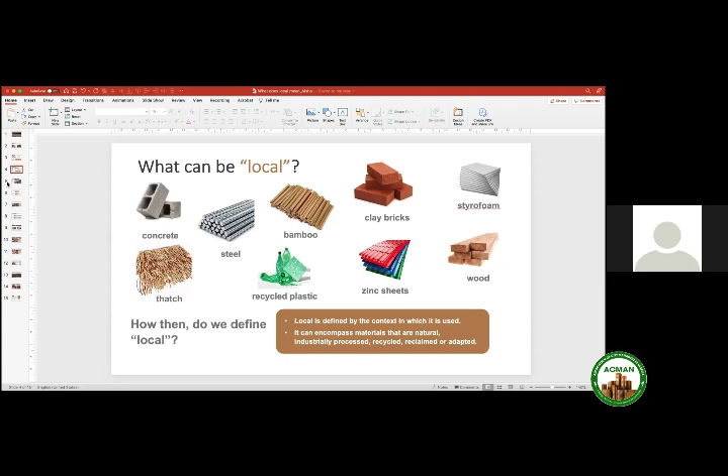But let's go ahead and look at local in the context of displacement. Displacement usually comes about through

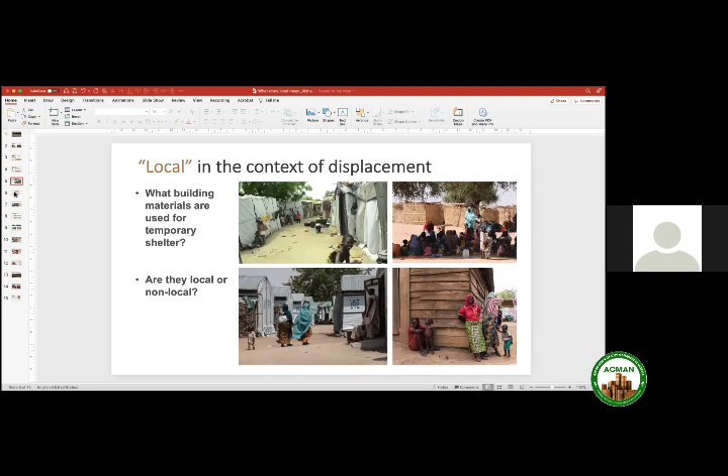conflict or disaster, whereby people lose their homes, their livelihoods, and even families sometimes. If you look at the images on the screen right now, you can see a mix of materials. Some could be termed as local, some could be termed as non-local, but they're all materials that are used for temporary shelter.

If we dig deeper, we can then see there are different conditions that influence material selection. In the context of displacement, what we're thinking about is the uncertainty of how long that displacement would last and how safe it is for people to even move somewhere else and settle.

We're quickly thinking, okay, how do we get shelter delivered to these people? We need to construct shelter for them very fast. And there are economic constraints attached to such conditions. You usually have the UN providing aid.

So again, finding the labor and the skills needed to be able to deliver such rapid construction is quite difficult in the scale that it would be needed.

And then we would also need to keep in mind that such communities and such developments for displaced people are always termed as temporary settlements. So whatever is constructed should be something that is easily disassembled.

With that definition, we can look at different local materials, such as the ones that we saw in the previous images. There was wood, there was thatch, there was zinc, there was also tarpaulin, which may or may not be termed local depending on where it is sourced from.

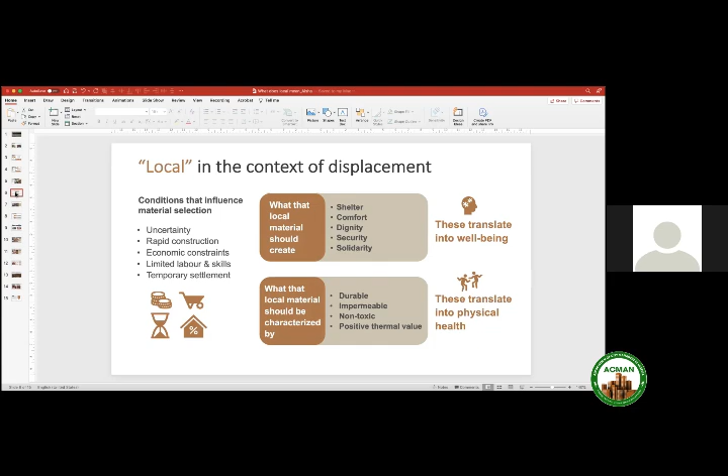It should be impermeable to the elements of weather. It should have non-toxic characteristics, and it should be able to provide some sort of thermal value, either by being an insulator or a conductor.

So if we look at an example, we have our architect Rizvi Hassan, who standardizes local materials in refugee camps for Rohingyans in Bangladesh. He uses materials like concrete for the base of the buildings and cement to do the flooring and make it impermeable.

He uses metal sheets for the roof of the wall panel such that it's easy to construct the buildings and dismantle them when they're no longer needed. And then he added plastic mats for the ceiling to serve as insulation.

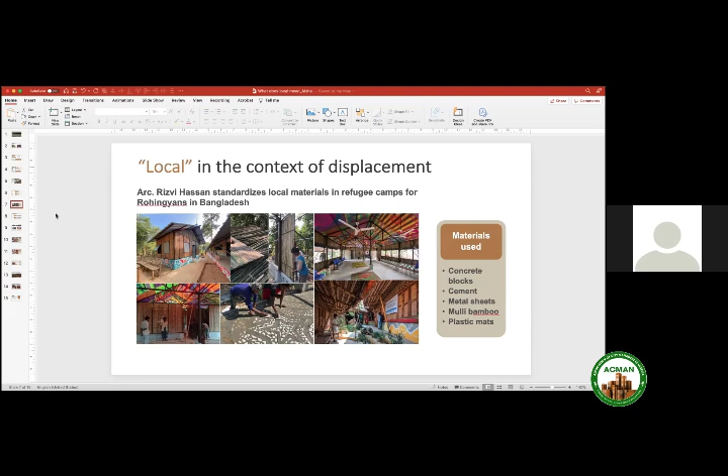Now, looking at it critically, we would then ask ourselves, is local always good? Local materials have impacts on our well-being and our health. If we're looking at well-being, it could be termed as the social dimension, whereas physical health would belong to the environmental dimension.

In the social dimension, like we spoke about previously, it would be safety, social ties, culture, and our livelihoods. So in the social dimension, a local material could have both positive and negative impacts.

It could create jobs through the sourcing of the material, its application in construction, as well as maintenance after construction has been completed. It could also strengthen social networks between the users of the building as well as the actors involved in the creation of such buildings. And it could strengthen cultural identity by making the local material to be perceived in a more positive aspect.

On the flip side, it could lead to stakeholder power struggles, where certain people feel they have more rights to claim a material as local to them. And in terms of the sourcing of such materials, it could also lead to insecurity challenges to the safety of the actors involved in extraction.

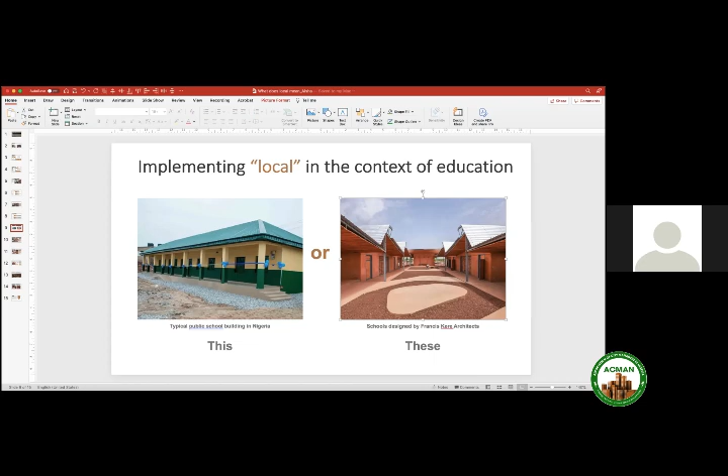Let me just see if that might work. So these are schools designed by Francis Kere, who has already been touched upon by many of the speakers before me.

And I would like to do a little deep dive into that. So he standardizes local materials for school buildings in Africa. He uses earth, bricks, metal sheets, steel rods, and eucalyptus wood, which is actually a non-indigenous species to Burkina Faso, as well as concrete.

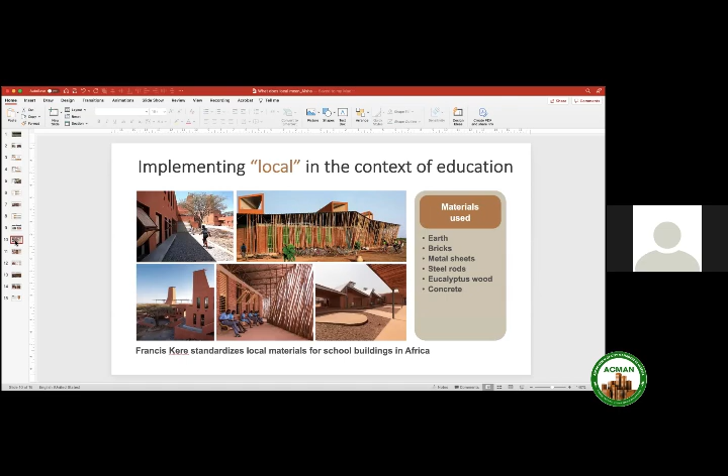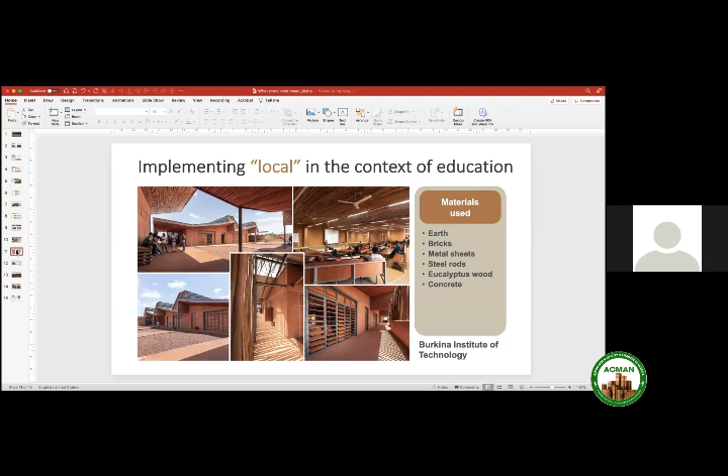In one of his buildings, the Burkina Institute of Technology, he uses earth that has been reinforced with cement, bricks, metal sheets, steel rods, and the eucalyptus wood for the ceilings and the shading devices for the walkways around the school.

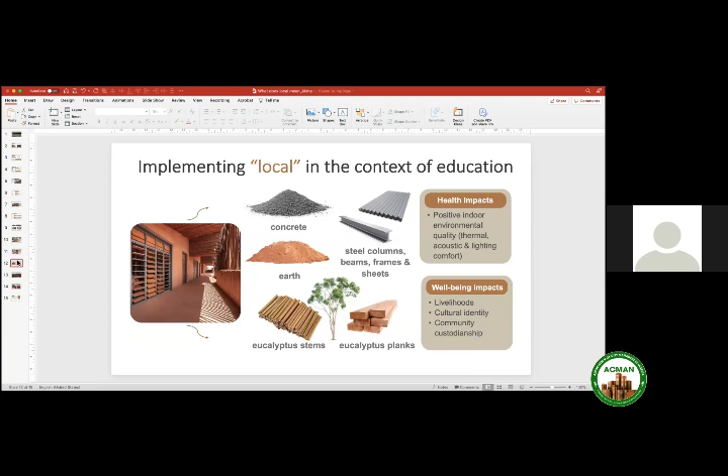And if we're looking at it in terms of health impacts and well-being impacts, the combination of these materials creates a positive indoor environmental quality in terms of the thermal, acoustic, and lighting properties of this building. It also impacts the well-being of the people, the users, the community, people involved in the construction through the creation of livelihoods, a positive cultural identity, and improved community custodianship of the building.

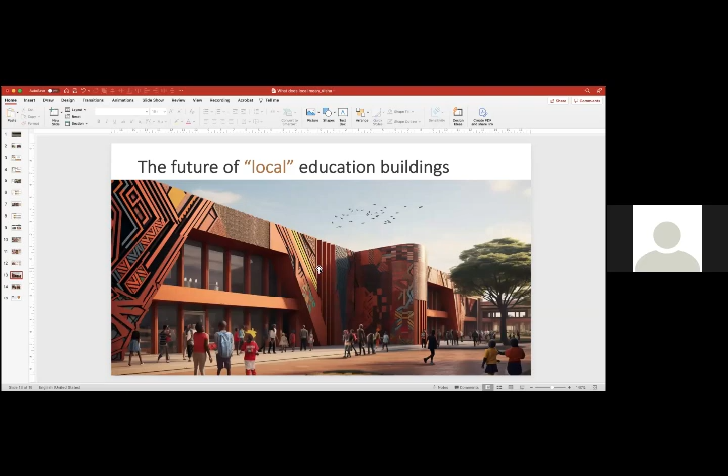I mean, the possibilities are endless. You could also think of this as being some sort of metal perforated panels that have been infused with concrete reinforced clay for the building and glass.

And another example is this, where you could think, okay, this is a mud structure that has been painted over with various colors and motifs representing the African culture.

And I believe that a local school building like this would help in transforming the quality of our educational sector. I would prefer to go to a school that looks like this, and I believe that it would enhance my health and well-being and also affect the quality of education that I would receive.

And that brings me to the end. Thank you very much.